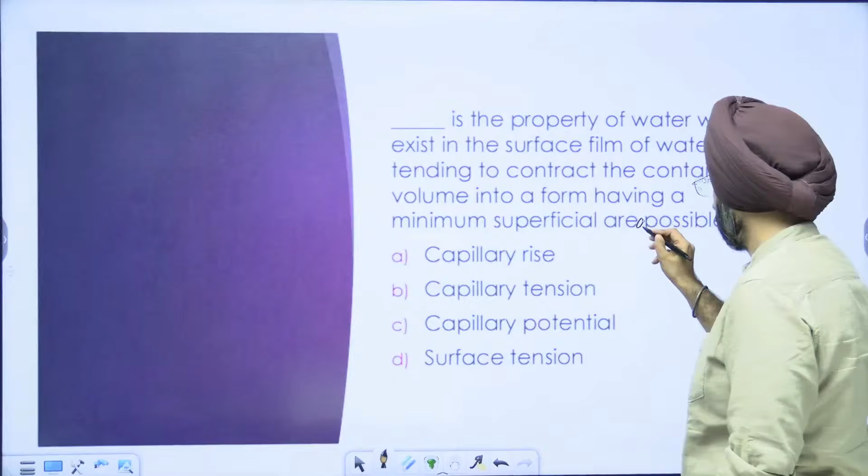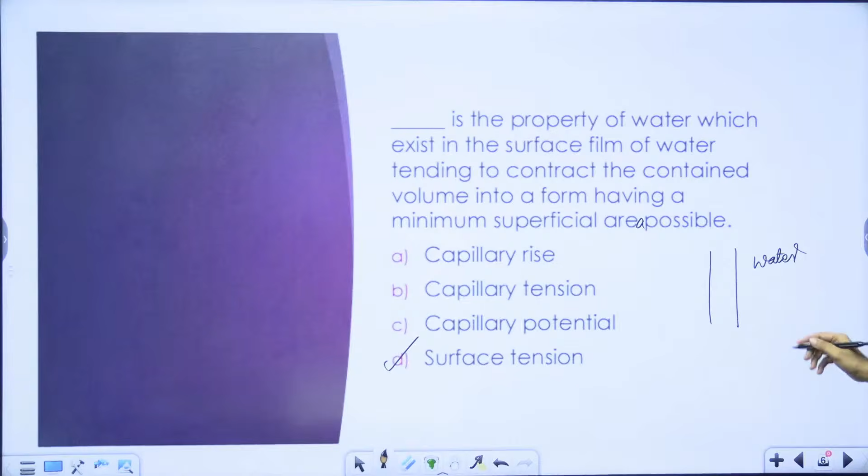Namaste. The answer is surface tension. Now I have a very interesting question for you. Let's say in a capillary tube we have added water. Now if the contact angle is 0 degree, what is the shape of the meniscus? Is the shape of the meniscus convex upwards or is it straight?

Namaste, namaste. Now listen to the question one more time. My question is that in a capillary tube you have put some water. The contact angle is 0 degree. What will be the shape of the meniscus? Will it be straight or will it be convex upwards?

So nice, so interesting, so intelligent. My dear children, none of the options is correct.

Now this is a very interesting concept and I am sure you will love this. You must know what is the meaning of contact angle. The contact angle is that angle where a fluid makes contact with the solid body. Now, if I say that the contact angle is 0 degree, this cannot be the form of the meniscus, because here the fluid comes in contact with the solid at 90 degree. So many students give the answer that the meniscus would go straight, which is not the case.

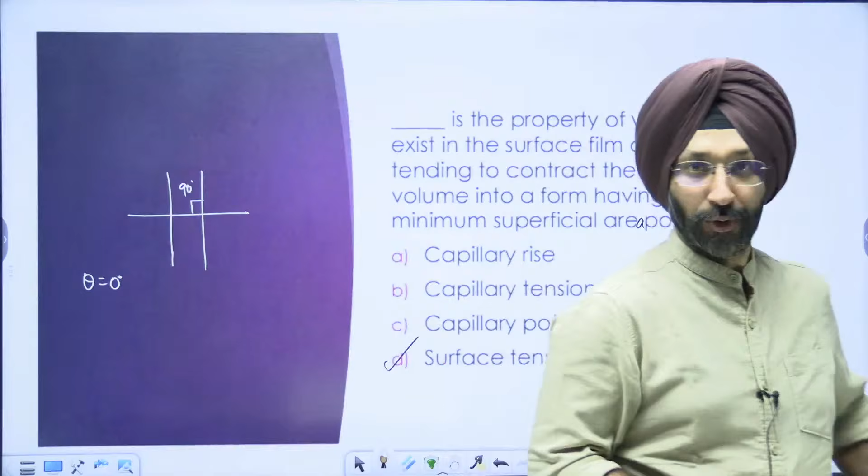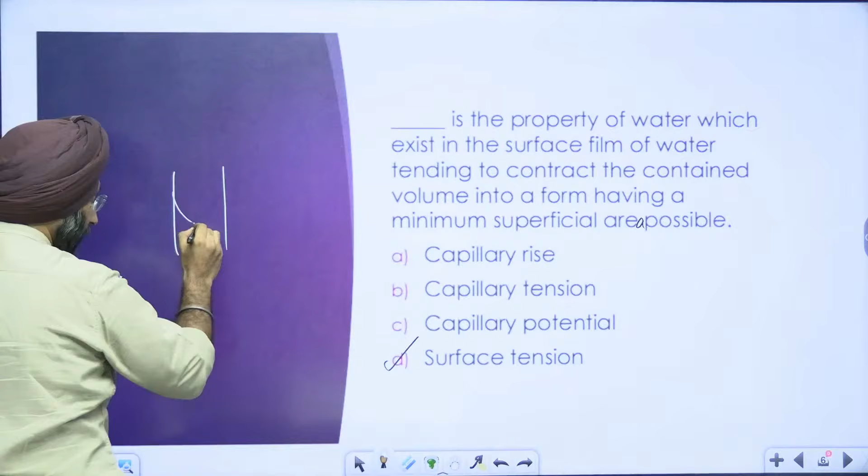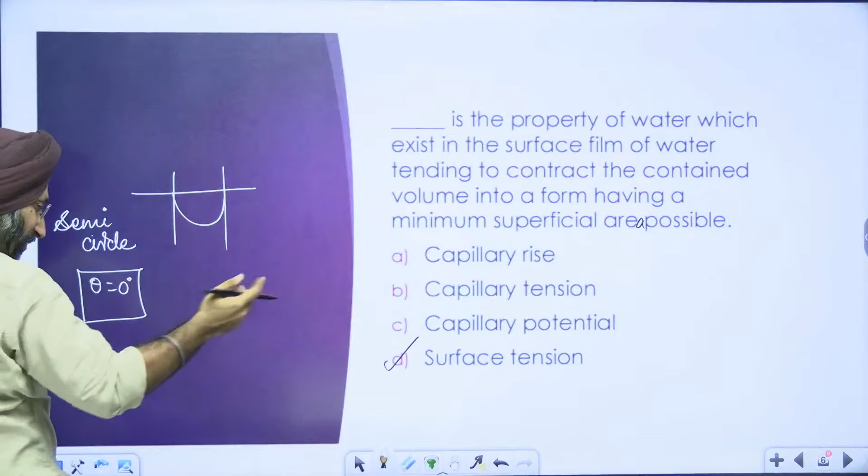So this is not the answer. So what is the shape of the meniscus? In order to make the contact angle 0 degree, this should be the meniscus. Here the contact angle, the fluid comes in contact with the solid and makes an angle of 0 degree. Now this is the shape of the meniscus, and this shape is a semicircle. So when the contact angle is 0 degree, in case of clean water, the shape of the meniscus is a semicircle.

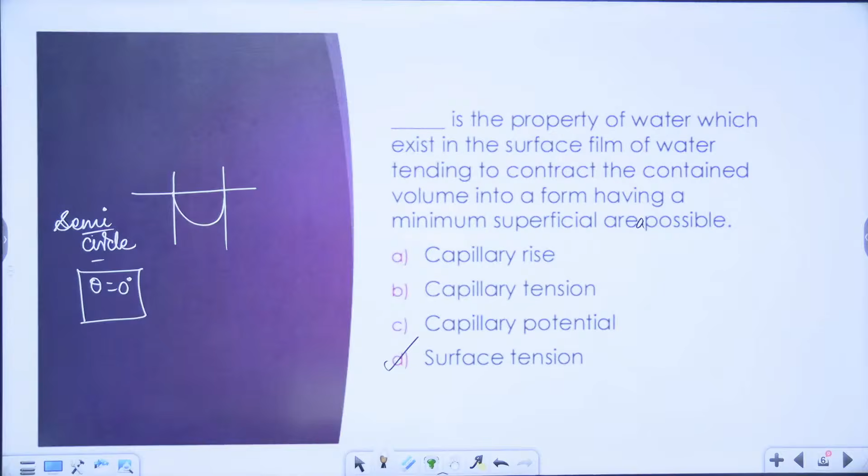What is workable? I gave so many advices, I forgot which advice of mine has worked in your favor. My dear children, in the morning I open up the mail and there are so many mails from students, and every single day I give so many advices. I believe sometimes I give more advices than a doctor and a lawyer combined. So which advice of mine worked for you? But I am happy it worked for you.

Jimmy, very good, Jimmy, Jimmy.

Characteristic load is that load which has a 95% probability of not being exceeded during the life of the structure.

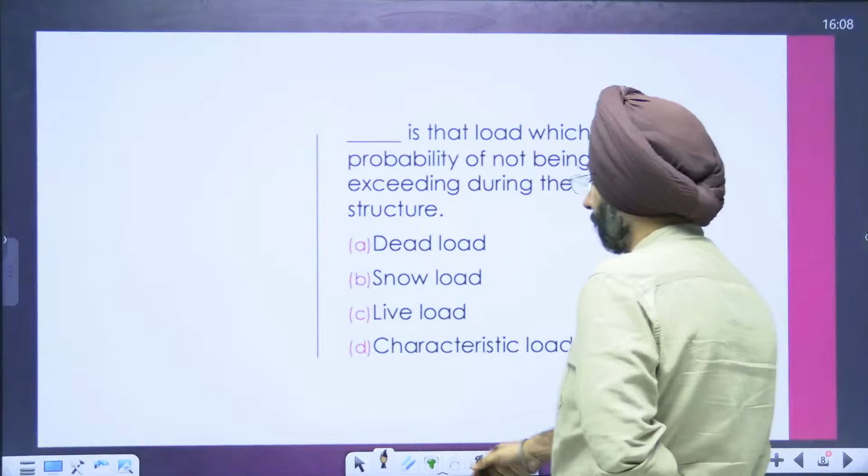Which load has a 95% probability that it won't be exceeded during its life? The question is very easy. This is characteristic load. Now my question to you is, through which IS code do we find the value of

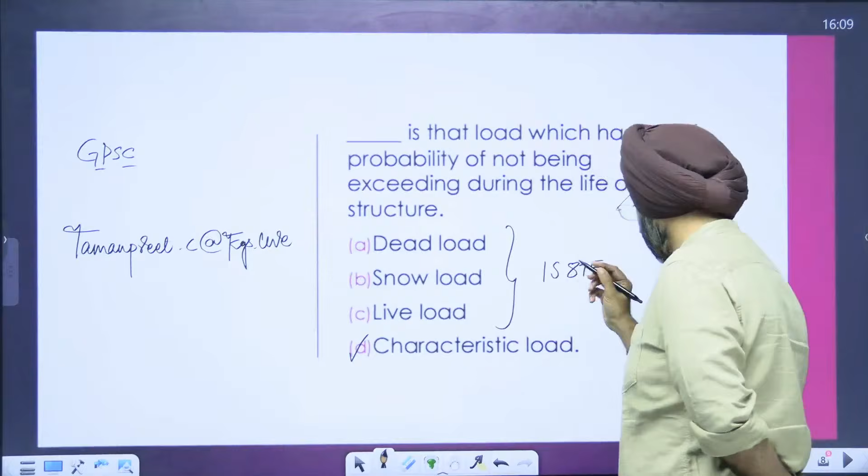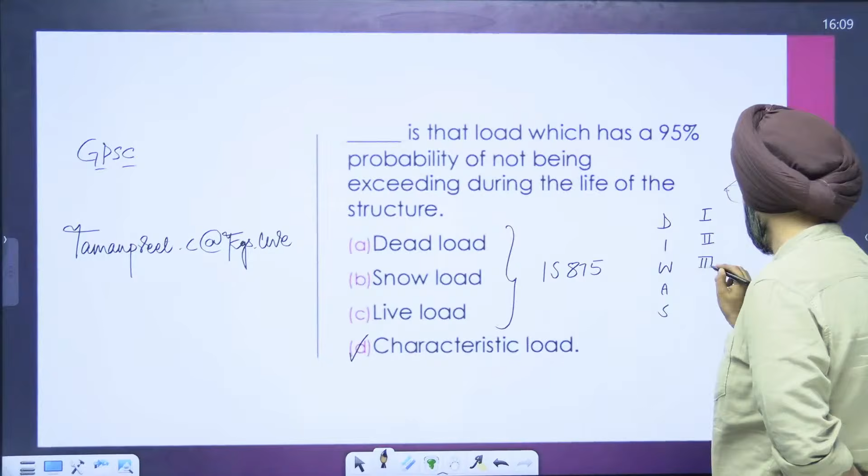And we have made a code for this, which is DIWAS. So dead load is part first, imposed load is part second, wind load is part third, and snow load is part fourth. Part fifth is the combination of these loadings. You have mailed me, definitely I will be checking it.

So mere pyare bachon, characteristic load and design load, you must know the difference between the two. What is the shear force for the given figure of a cantilever beam and loading? What is the shear force?

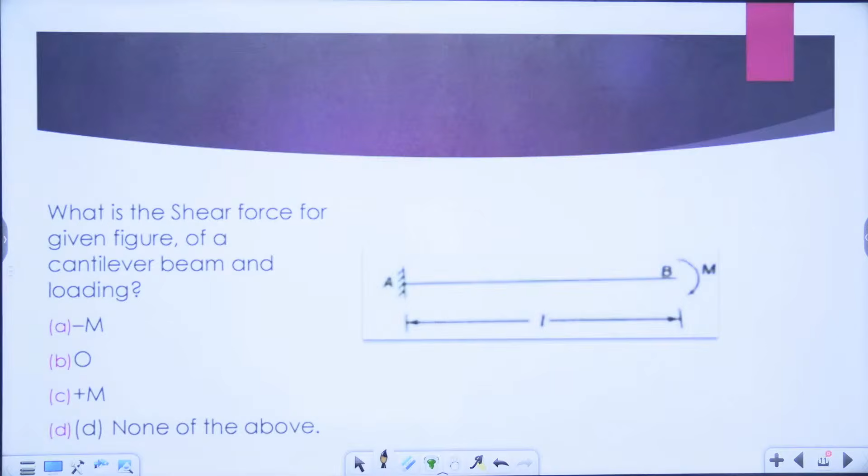Yes, bacho, this beam is under pure bending. So bending moment is constant, but no shear force is induced. Zero shear force.

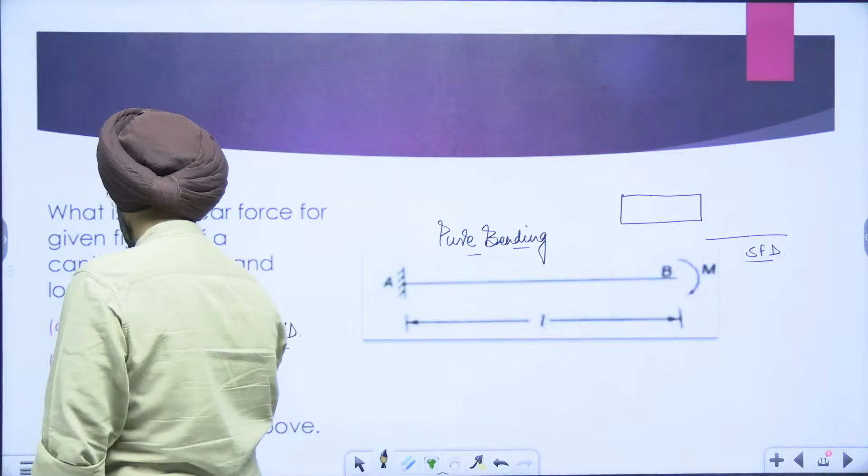Okay, if I ask you that among these options, which represent the bending moment diagram? So what should be the answer? If I ask you in the given options, which represent the bending moment diagram, what would you say? Yes, minus M, because the beam hogs. That's why.

What is the Poisson's ratio? Oh, so easy question. What is the Poisson's ratio? So this is a very simple statement. Poisson's ratio is minus of lateral upon longitudinal strain. Lateral upon longitudinal.

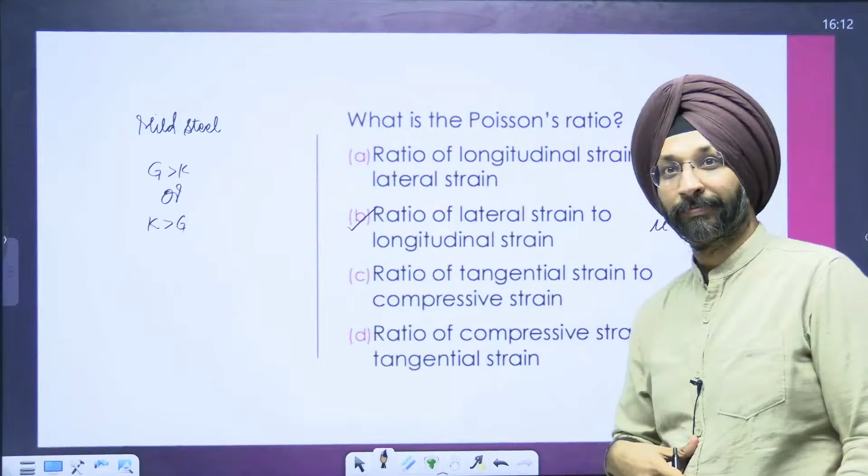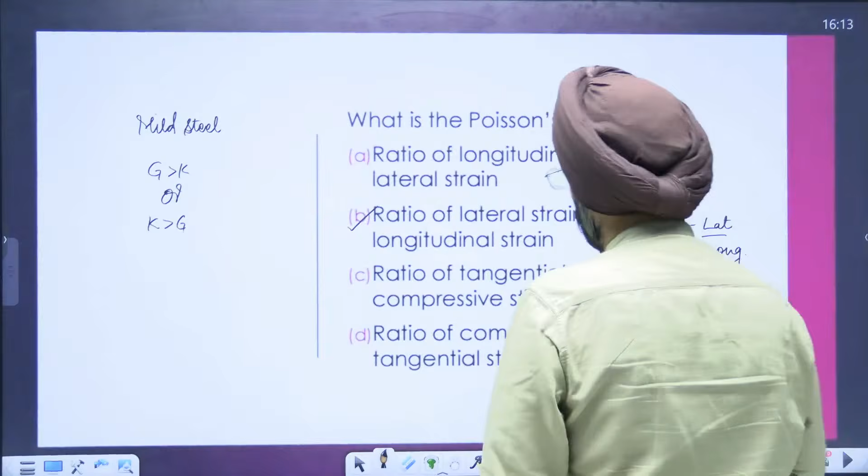But for mild steel, can you tell me, is G greater than K, or is K greater than G? For mild steel, between bulk modulus and modulus of rigidity, which parameter is greater? Now, in order to solve this question, first of all, you must know the value of Poisson's ratio for mild steel. Can anyone tell me what is the value of Poisson's ratio for mild steel? The value is 0.3.

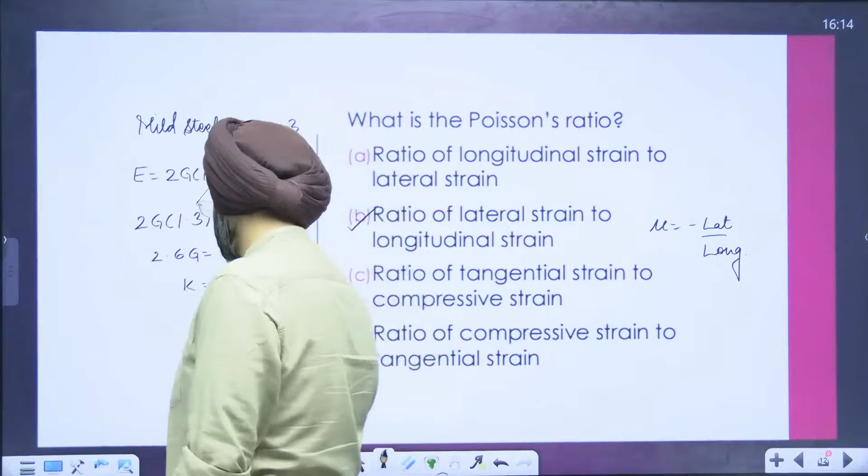Now, E is 2G(1 plus mu), but E is also equal to 3K(1 minus 2 mu). So 2G with mu is 0.3, 3K(1 minus 2 mu). This is 0.4. So 2.6G is equal to 1.2K. So K is 2.6 upon 1.2 G. Now you can clearly see that this ratio is greater than 1. It implies K is greater than G for mild steel. So this relation is valid for mild steel, and as you can see, E is greater than both of these terms. So for mild steel, Young's modulus is greater than bulk modulus, which is greater than modulus of rigidity.

So this question is very interesting in fact. But which material has zero Poisson's ratio? Which material has zero Poisson's ratio? I'll give you a geotech question on the spot, my boy.

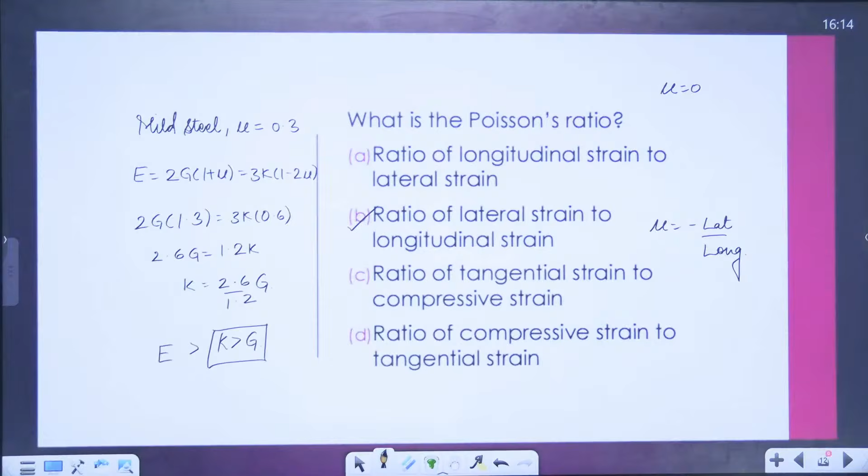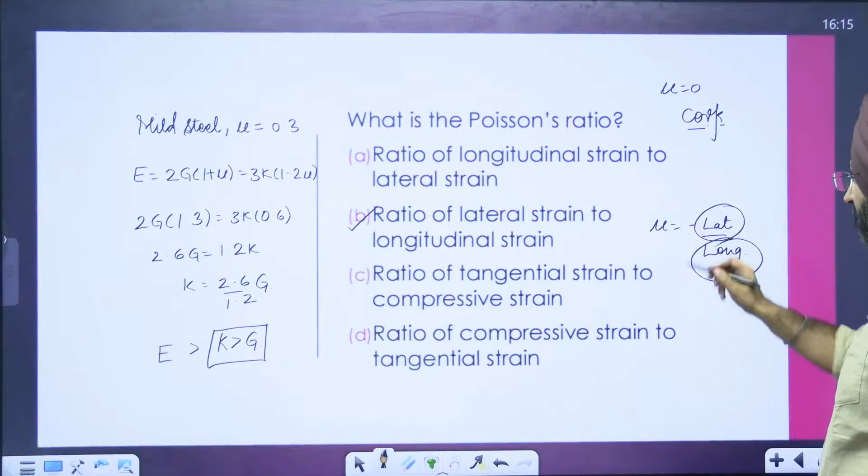For richer mixes, the value of Poisson's ratio increases. This is cork. So what happens to cork is when you apply the load, the longitudinal strain occurs, but there is no lateral strain. So in case of cork, when you apply a tensile load, the length of the cork will increase without any change in the lateral dimension.

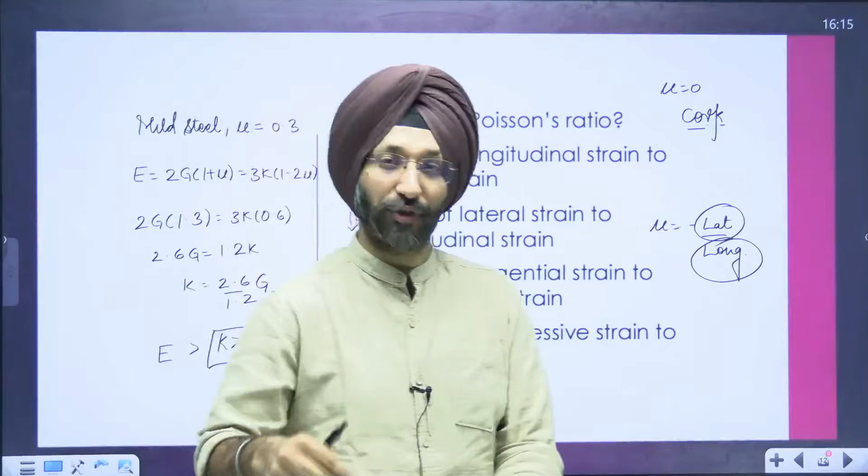Now, this has a very unique purpose in case of the bottles of champagne. So what happens in champagne is you seal the bottles of champagne with cork. Now, the external and internal pressure is applied on this cork. So the cork compresses. Now, if the cork compresses, or if a material compresses, its lateral dimension should expand.

Now, this may lead to the breakage of the bottle. But in case of cork, when the longitudinal dimension changes, there is no change in the lateral dimension. Now, this keeps the bottle intact. So this is the reason cork, which has a zero Poisson's ratio, is used to seal bottles. Pyare bachcho, if you get this concept, then please write yes.

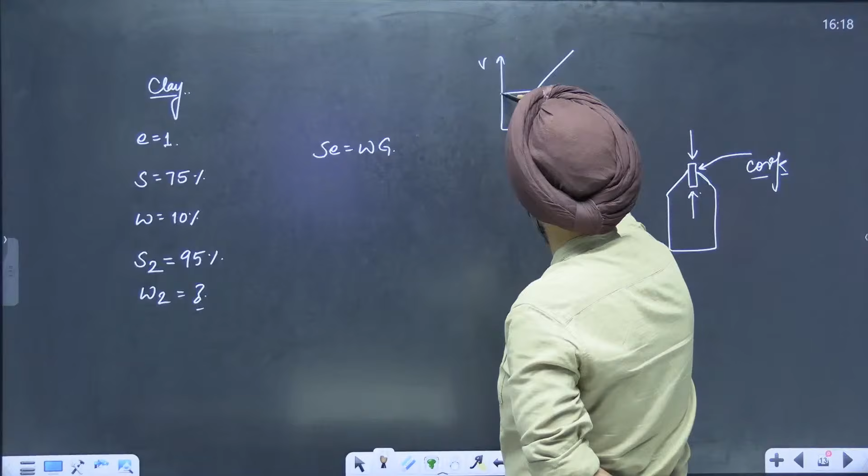So pyare bachcho, you will say sir, Se equals wG. Now if I draw the diagram up to shrinkage limit, you know this that before the shrinkage limit, the soil is partially saturated. So if we increase the degree of saturation from 75 to 95%, we have increased the water content without changing the void ratio. So void ratio remains the same and so does the specific gravity.

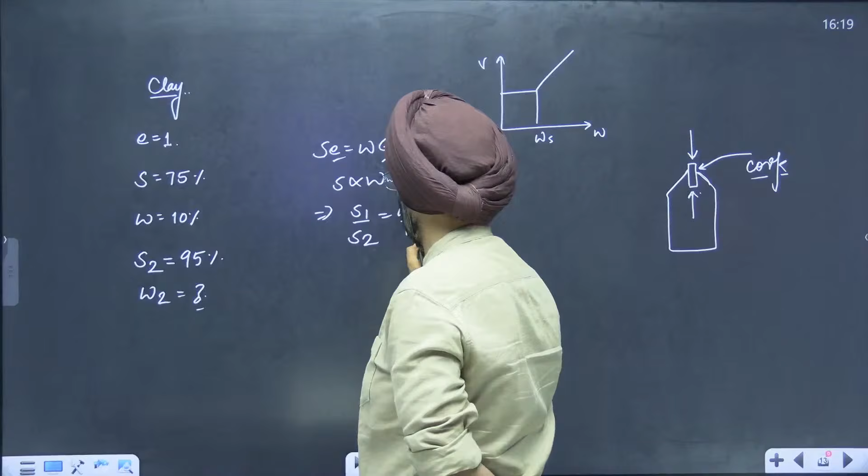So S is proportional to W. So S1 upon S2 is W1 upon W2. Degree of saturation is 75, water content is 10. Now it is changed to 95. What is the water content? This is the question. So all we need to do is solve this simple calculation which you have already done. So 95 by 75 gives 12.67. So water content is 12.67%.

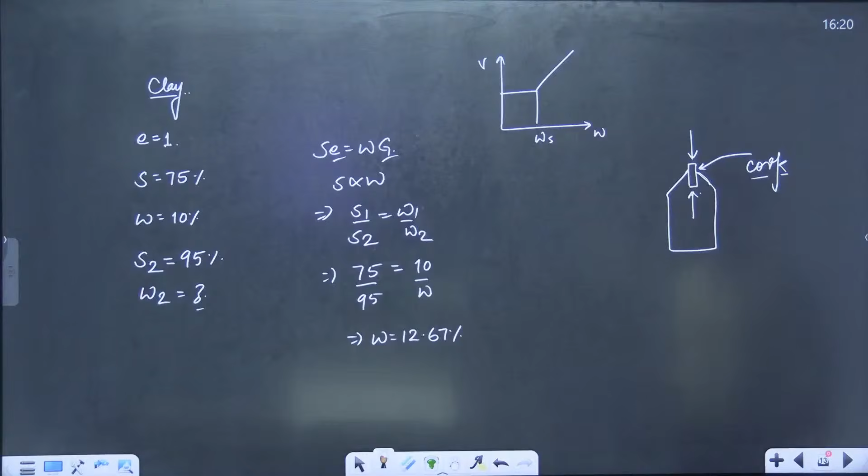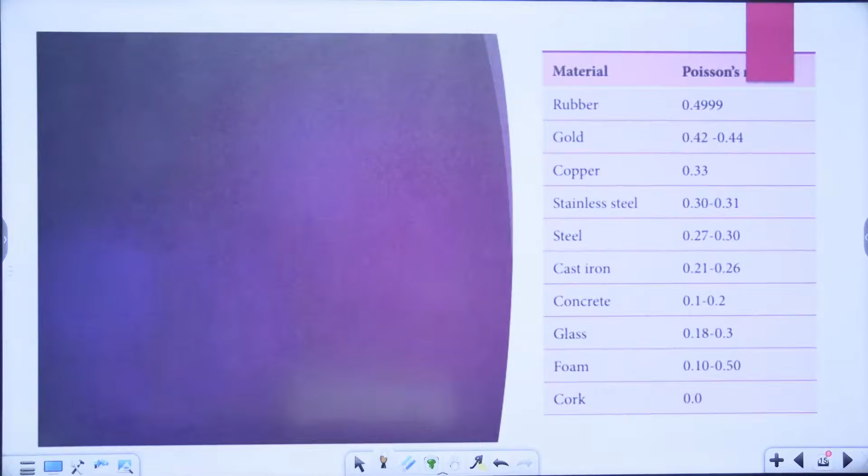Now, this is the value of Poisson's ratio for certain materials. Make sure you know this value, because frequently the Poisson's ratio value for certain material is asked.

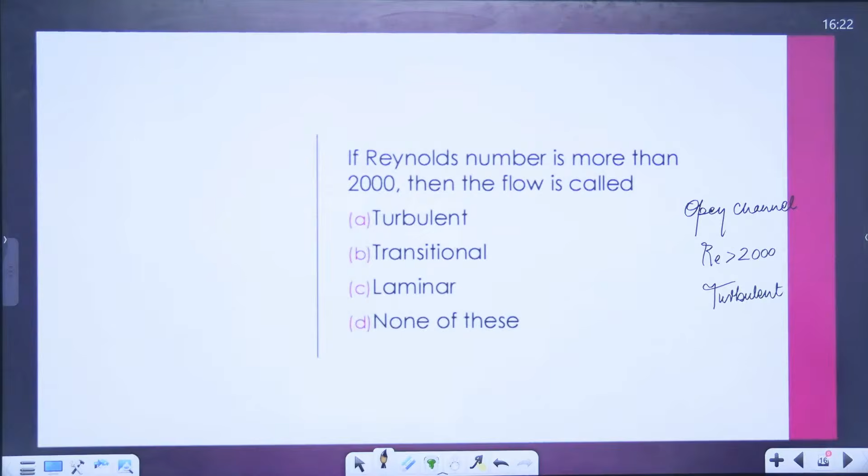So now if we use some very interesting concepts, then for the given question, the most appropriate answer is turbulent. Because now if we need to select one answer, two answers cannot be done here. We need to mark only one answer, then answer should be turbulent. We will assume that they are talking about the open channel. For pipe, option A and option B both could be correct. But this is an MCQ, only one option need to be selected. Then we will go with open channel, because for open channel, if the Reynolds number is greater than 2000, it has to be turbulent.

Good question. Mere pyare bachche, we should not go with none of these because, as I said, the answer can be turbulent because they have not mentioned what type of conduit is this. And this question is asked in competitive exams and the option marked is option A only. Don't go with option D, mere bachcho. I am already explaining this, that the answer is option A because it is not mentioned in the question which type of conduit is this.

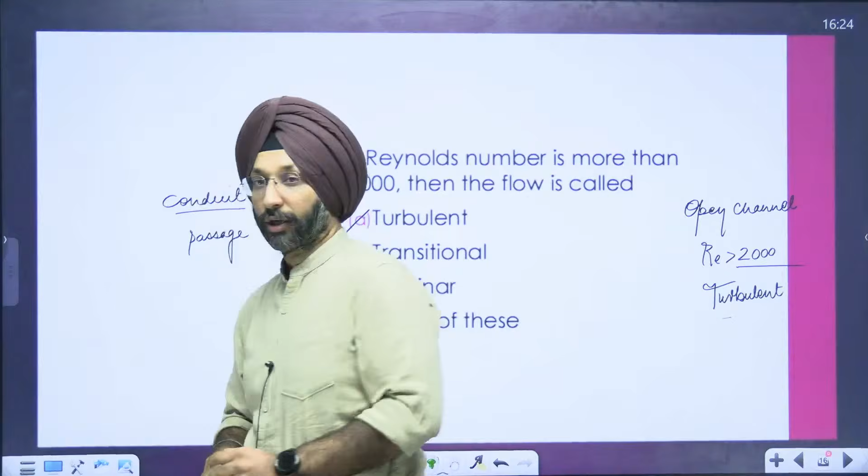What is a conduit? Conduit is a passage through which a fluid moves. So pipe is a conduit, open channel is a conduit. They have not mentioned the type of conduit. You assumed it that the conduit is pipe. Eventually it is not. Now let's say if the option transitional was not there, then you can say the answer is option A. If turbulent was not there, again you can say the answer is option B. But when both the options are given and it is not mentioned the type of conduit, assume it to be open channel and then give the answer. Once you assume it to be an open channel, then you are 100% sure it has to be turbulent.

Mere pyare bachcho, you must have heard that shrinkage ratio is V1 minus VD divided by VD, divided by W1 minus WS. But this shrinkage ratio has another expression. That expression has gamma W in the denominator, and there is a term in numerator and denominator. Can you tell me what comes in the numerator and denominator? Gamma d by gamma w. Very good. Now gamma d is weight of solids divided by Vd.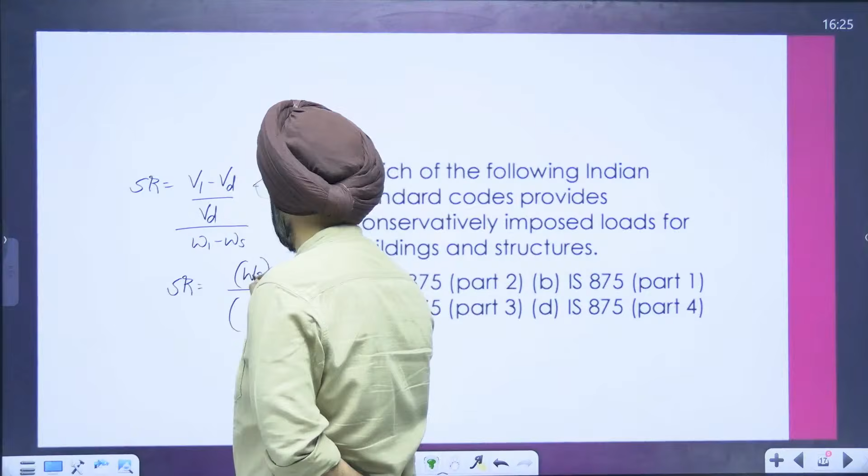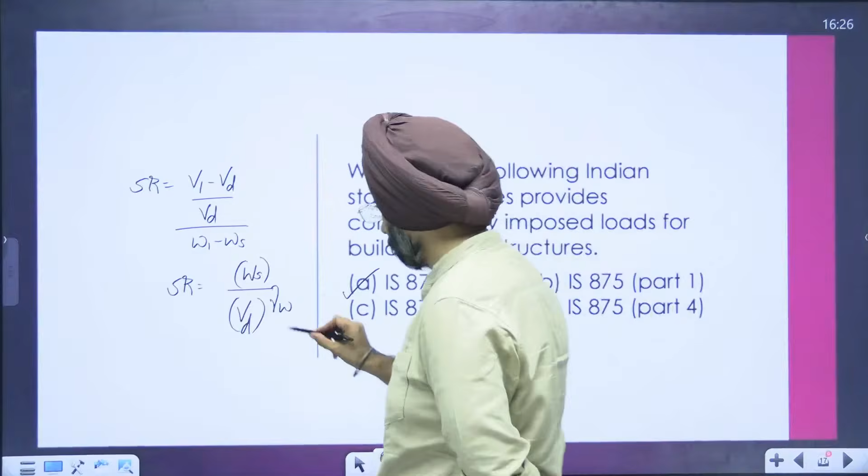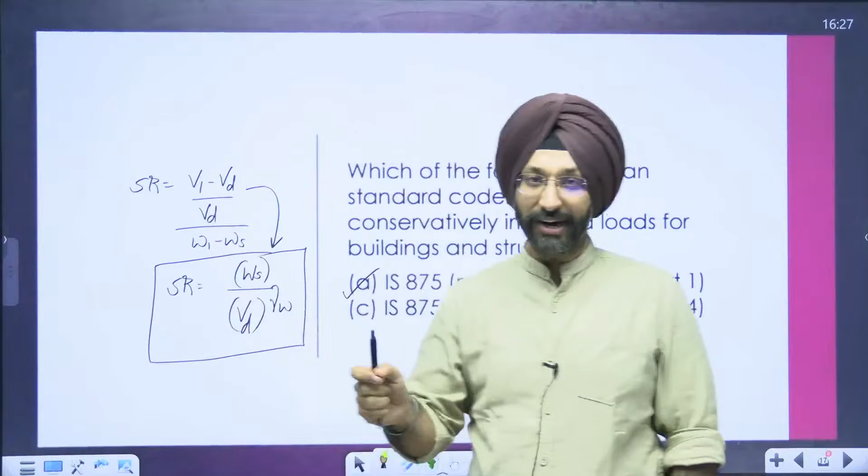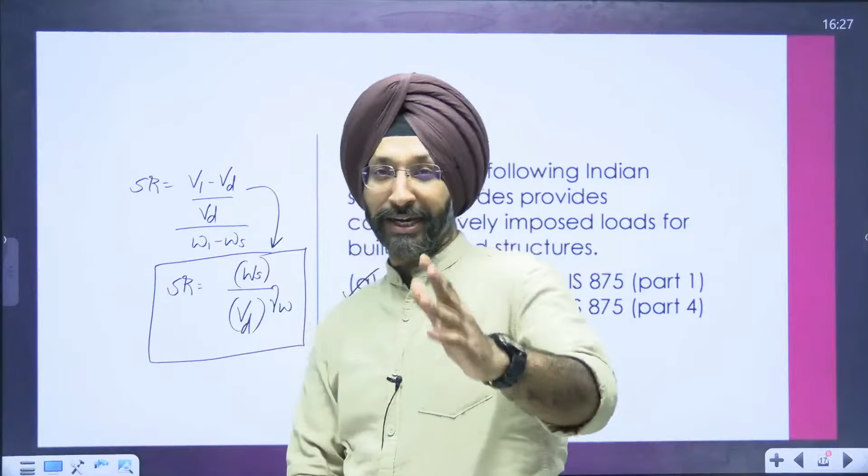Do you want me to derive this equation? Should I derive that, how from this value we got this value? Because if you already know the explanation, then we will move to the next question. And if you are not aware how we conclude the second formula, then I will derive it. Now mere pyare bachcho, you are about to learn something very, very interesting. And once we learn something new, and trust me, you will be learning something new, as you are not aware how we deduce this formula. So 100% in the next 5 minutes, you will be learning something very new. And once we learn something new, we should cheer it. So once you get the concept, I want you to use as many emojis as possible in the comment section if you get the concept. If you do not understand, then there is no need to write anything. Because the concept that I am just telling you, I believe you will love this. So pyare bachcho, we know this.

This is the expression. Let's say this is the water content W1. This is the shrinkage limit. At the shrinkage limit, the volume is Vd, the dry volume, and the volume at W1 is V1.

My question was how you deduce the second expression of shrinkage ratio. In order to derive that equation, first you must know the equation of this straight line. Let's say this point is C. We know that at point C, the soil is 100% saturated.

Now we know that SE is equals to W into G for any point at or beyond C. For any point at or beyond C, we know this, that the value of S is 100%. You know this concept: at all the consistency limits, the soil is fully saturated. So E is equals to WG.

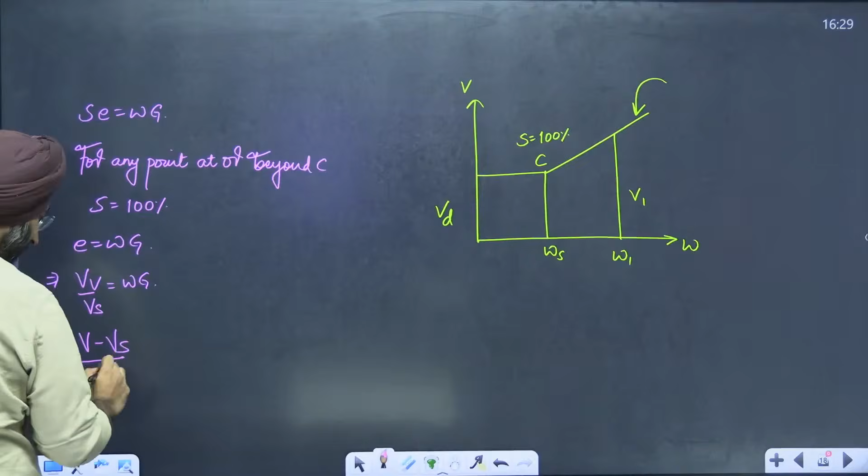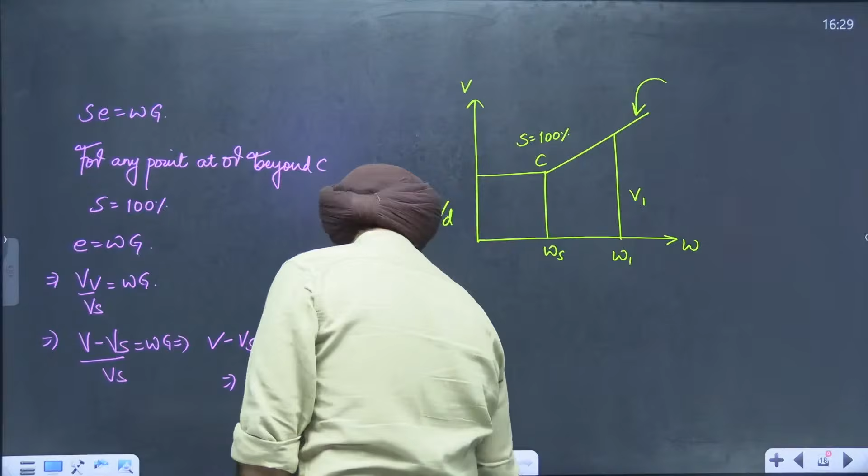Now what is the expression of E? E is volume of void by volume of solid. This is equals to WG. Now volume of void is total volume minus the volume of solid, divided by Vs, equals W into G. Cross multiply: V minus Vs is WG into Vs. Rearrange this, so V is equals to G into Vs, in bracket multiplied by W, plus volume of solid.

Now what we have done is beyond point C, we came to know that the change in volume and water content follows a linear pattern, because if you compare this equation it resembles a straight line. So if I put volume on the y-axis, water content on the x-axis, what I get is a linear variation. The first thing we can deduce is how we come to know that beyond the shrinkage limit, the volume varies linearly.

We know that the volume varies, but why linearly? It could be parabolic or any other variation. So if someone asks you this, you would say that we have derived that beyond point C, the volume and water content vary linearly through this equation. So because of this equation, you are able to put a straight line beyond point C. So the volumetric change with water content is linear. Tell me, are you able to grasp this point?

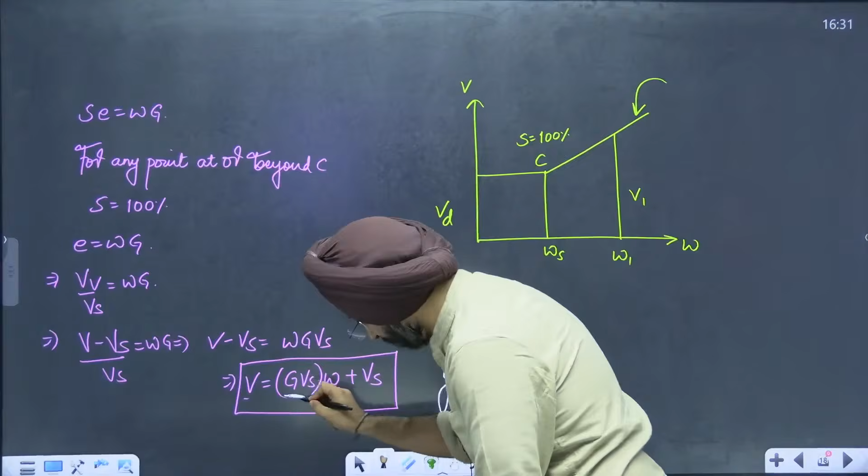Very good. Now this GVs is the slope of the straight line. So the slope of this straight line is G multiplied by Vs, simple mathematics. Now the expression for shrinkage ratio was...

V1 minus VD divided by VD, divided by W1 minus WS. We know that tan theta is the slope, which is perpendicular upon base. So this value is the perpendicular.

V1 is this entire value and VD is this value. So if I ask you what is the perpendicular, you will say V1 minus VD. In the same way, if I ask you what is the value of the base, you will say W1 minus WS. This is the slope of this line.

Simple mathematics. But we have already proved that the slope of this line is equals to GVs. Now V1 minus VD upon W1 minus WS, so we can write down G times Vs upon Vd.

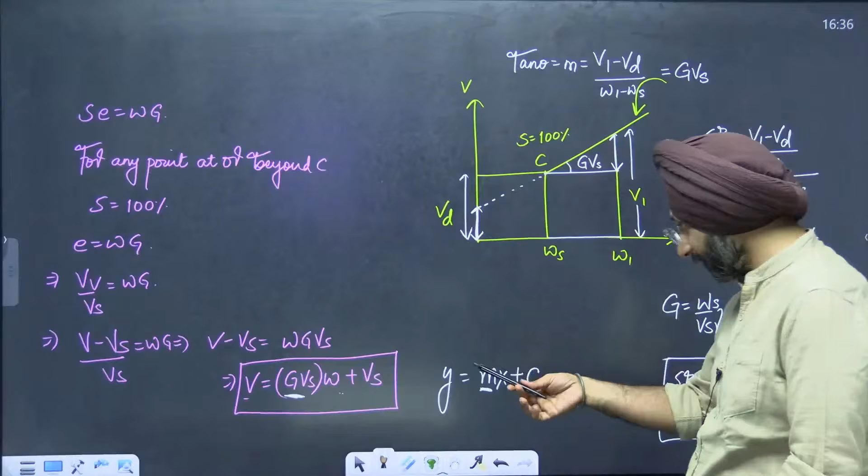Very good. This also you can deduce from this equation. Y is equals to mx plus c. This c is the intercept on the y-axis, meaning if you extend the line up to the y-axis, where would it cut the y-axis? So where will it cut the y-axis? At Vs. So this value is Vs.

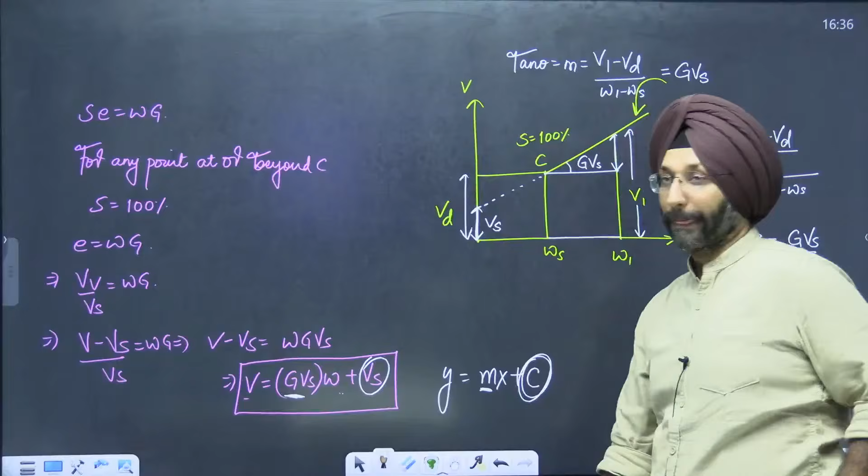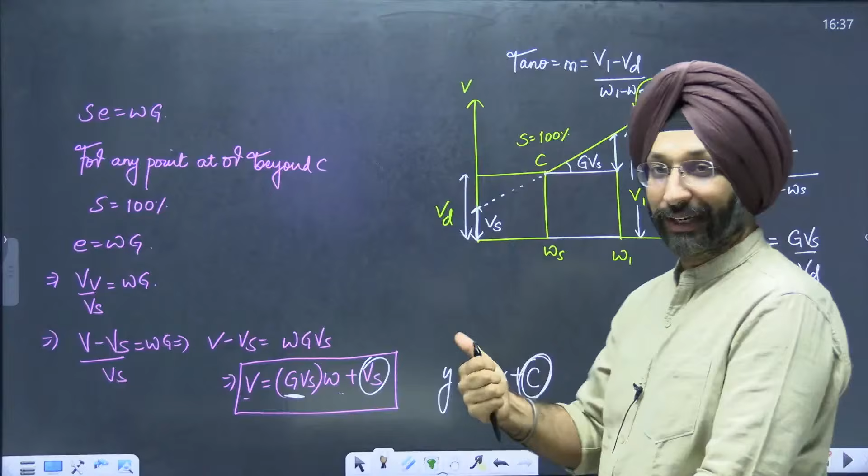This is what I always say to you, my dear bacho, that you need to learn the concept. It is very much possible that this derivation you may not need in your competitive exam, but once you get these type of concepts, you get the confidence. And trust me, competitive exams and life is all about confidence. Confidence comes from knowledge, and knowledge comes from hard work.

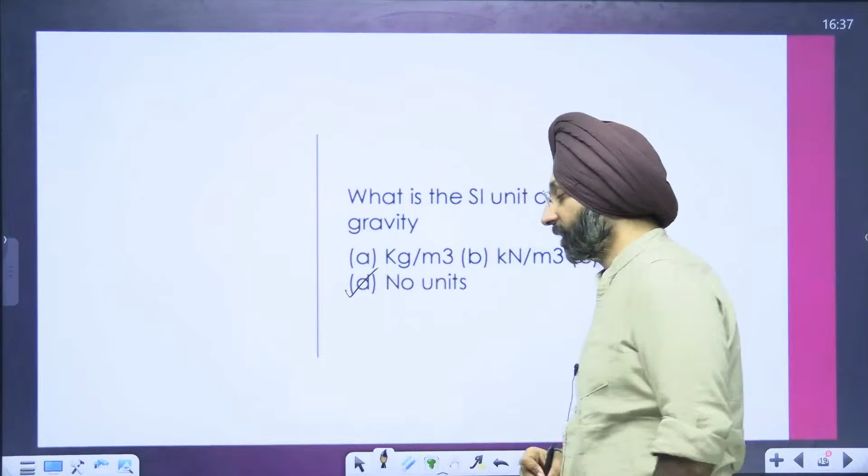Chalo, moving on to the next question. What is the SI unit of specific gravity? There is no unit of specific gravity. Density upon density, unit weight upon unit weight - there is no unit.

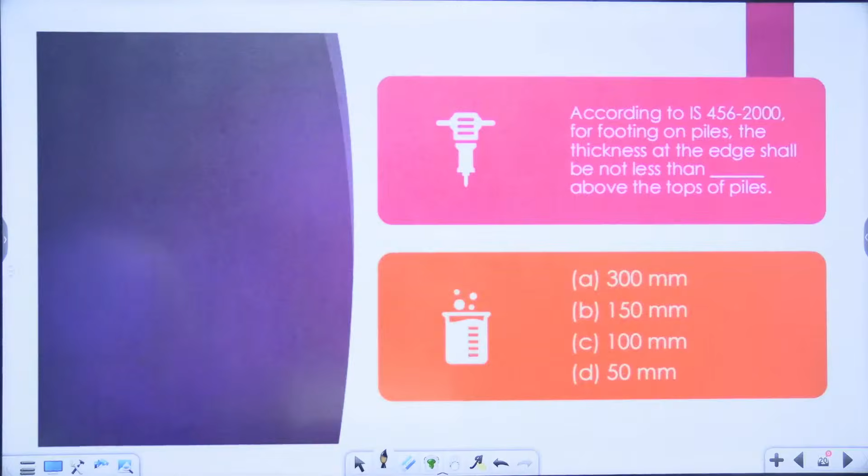According to IS code, for footing on piles, the thickness at the edge shall not be less than what? Now this type of question is all code based. If you have read the code, then you can answer it within 10 seconds. The value is 300 mm.

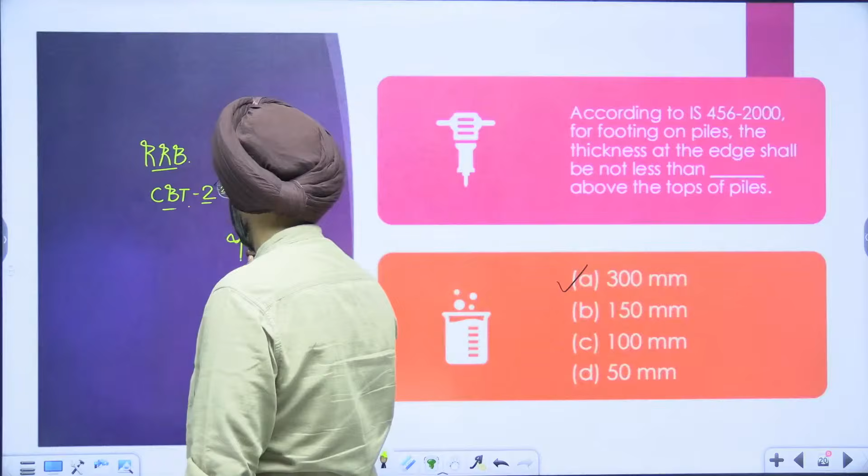The ratio of actual discharge from an orifice to the theoretical discharge from the orifice is known as what?

Oh, same day RRB and DSSSB. Now this is not commendable, because it is possible that some students may get selected in both the exams. And what?

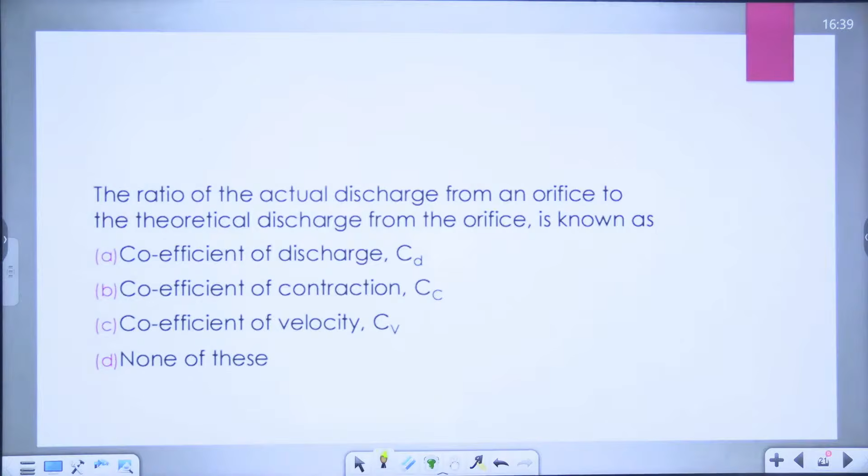This is coefficient of discharge.

This is pyknometer. This is pyknometer.

But this was not the question I was really putting effort into. My question is, you are aware with the symbols W1, W2, W3, W4. The numerator is W2 minus W1. In terms of W1, W2, W3, W4, what is the denominator? This is my question. Let's see how many of you know this.

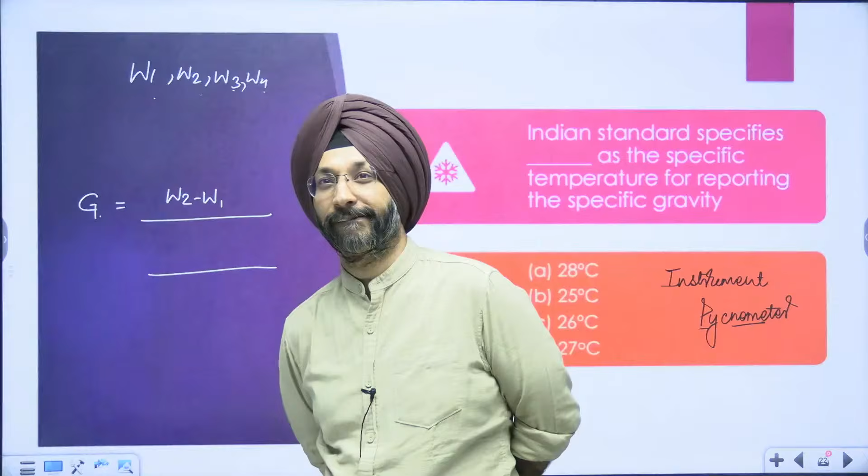Now I am writing down the denominator. Just check you have written it correctly or not. The denominator is W4 minus W1 minus bracket W3 minus W2. Now I am not saying which one of you have written it correctly or incorrectly. Just check it by yourself. Have you written it correctly? If yes, well and good. If not, then please make sure that you remember the formula correctly, because this specific formula is regularly asked.

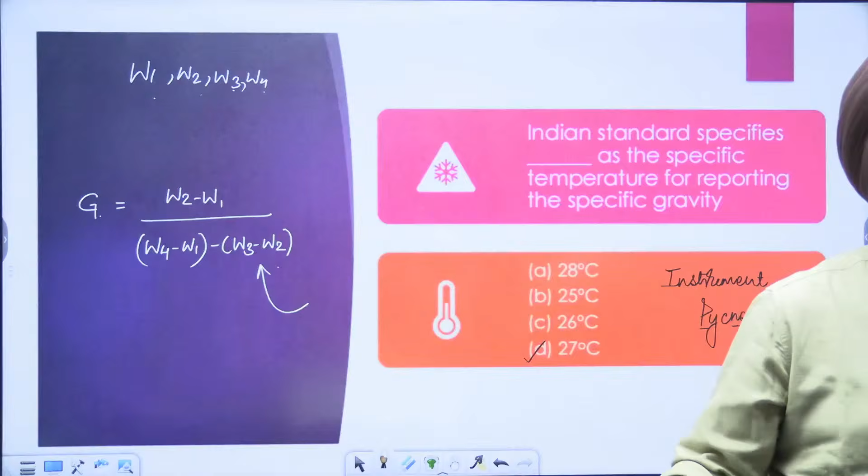Now we know that W2 minus W1. Can anyone tell me what is the value of W2 minus W1, mere pyare masoom bachcho? Good, this is weight of solids. So you can further simplify it. Weight of solids, open the bracket, W4 minus W3. Now open the bracket, this minus minus plus, W2 minus W1 means plus weight of solid. Okay, so please make sure you remember the formula correctly, as many students forgot the formula.

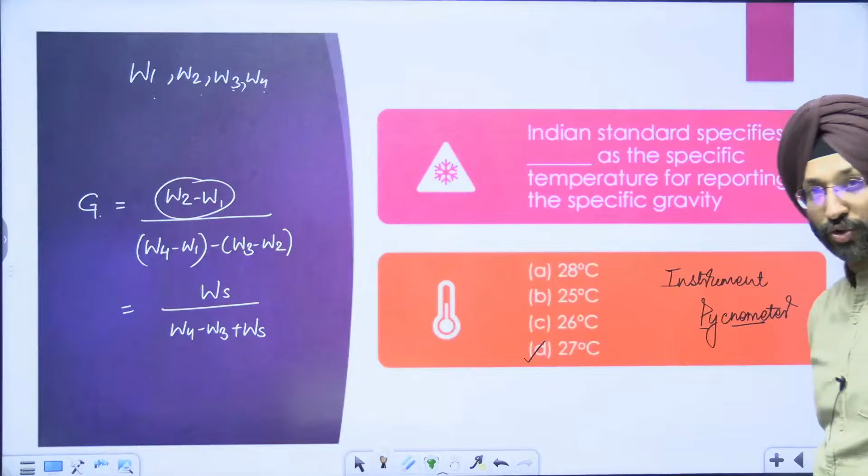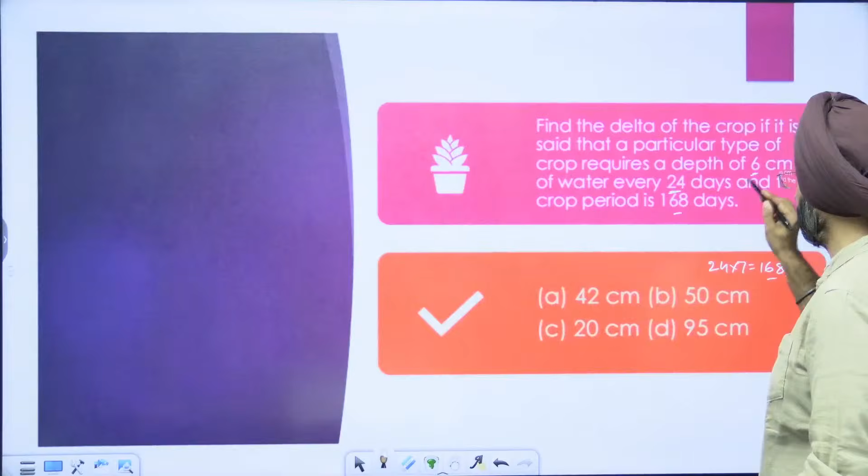Find the delta of the crop if it is said that a particular type of crop requires a depth of 6 centimeter of water every 24 days and the crop period is 168 days. Now this is very easy question. So first of all, find out how many times you need to water the plants. 24 multiplied by 7 is 168. So 7 times you need to do it, and every time 6 centimeter is the depth. So 7 into 6 is 42 centimeter.

In the limit state method, now this is a very easy question. What is the minimum strain in tensile reinforcement before its failure?

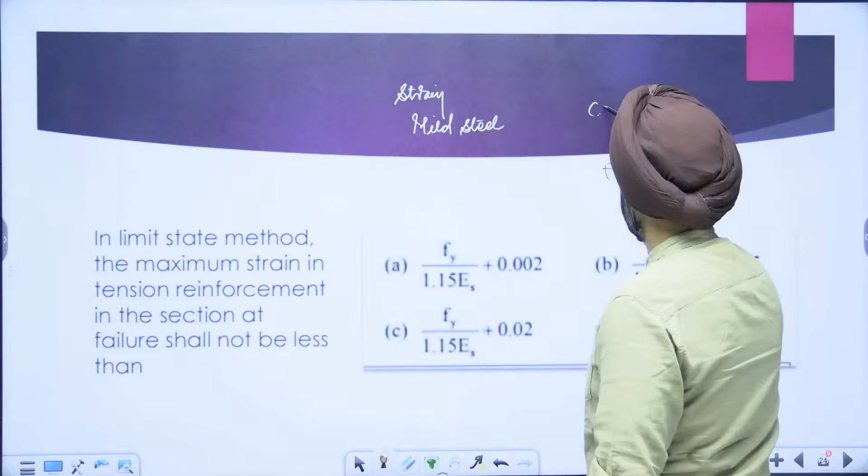Very nice. So based on this formula, can you tell me what is the strain at the time of failure in mild steel. This is the minimum strain, minimum. Oh sorry, maximum strain at the time of failure. Not maximum, sorry, this is minimum. 1.086? Okay, so you people are saying sir, the value is 0.001806. Obviously, in case of mild steel, you are not adding this value.

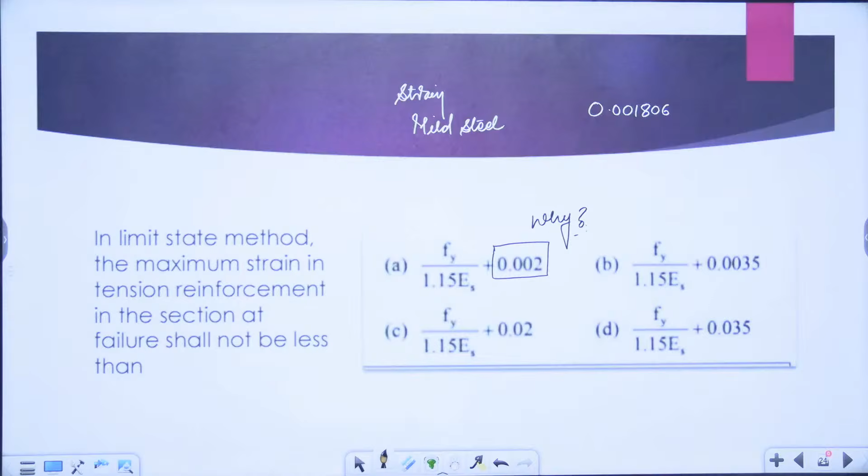Very nice, very good.

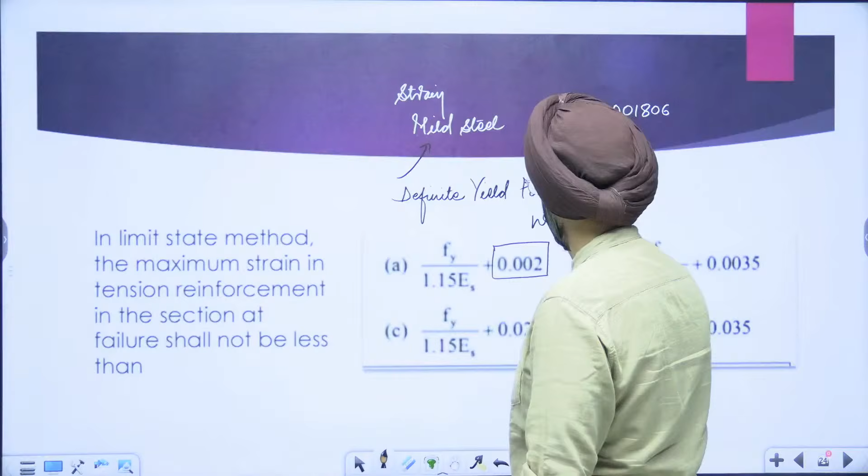For mild steel, there is a definite yield point. So in those materials where you have a definite yield point, you do not require the concept of proof stress or proof strain. So in case of Fe415 and Fe500, you need to apply the concept of proof strain, but not in case of mild steel, because in mild steel, through the stress strain curve, the yield point can be determined.

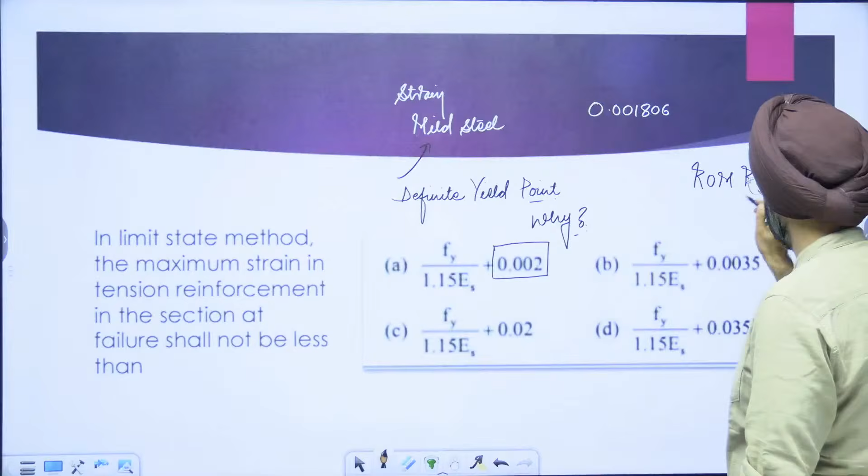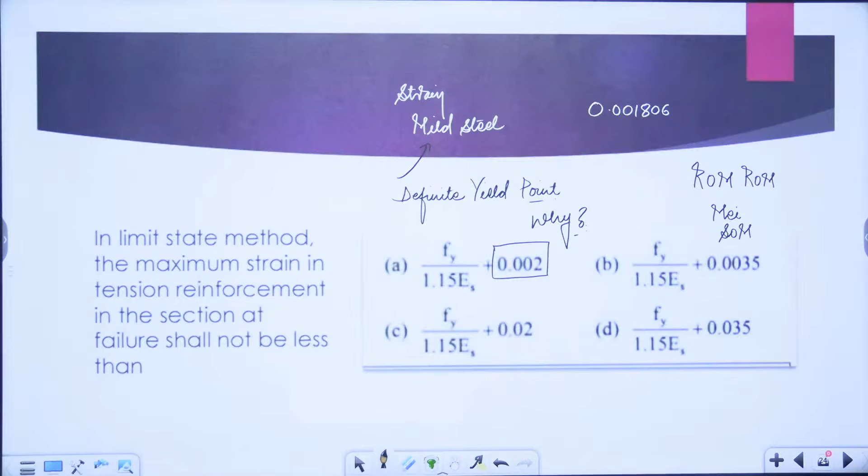Finally, I request one - sir, what is this? SOM class, where do you want me to conduct the SOM class? In my early days as a teacher, my tagline was 'rom rom mein SOM' - so much I love SOM. And to be honest, I was among the university toppers in strength of materials - not the university topper, but among the toppers. At least of my college, I was the topper. And in my days, there were very few civil engineering colleges in Uttar Pradesh.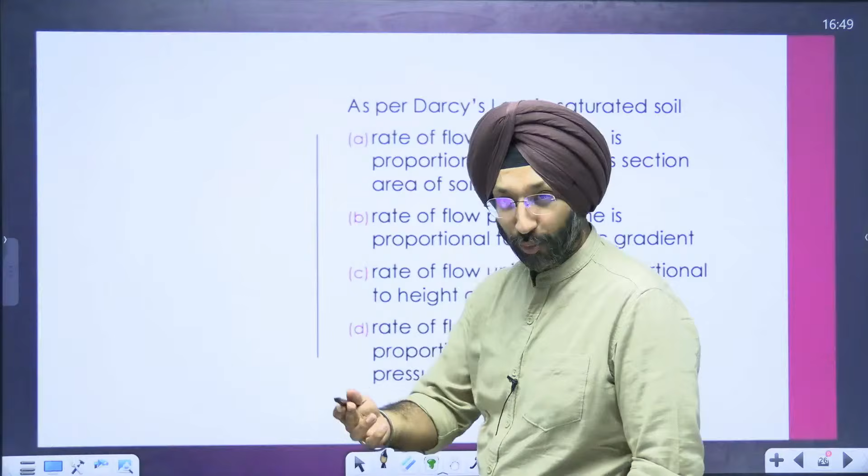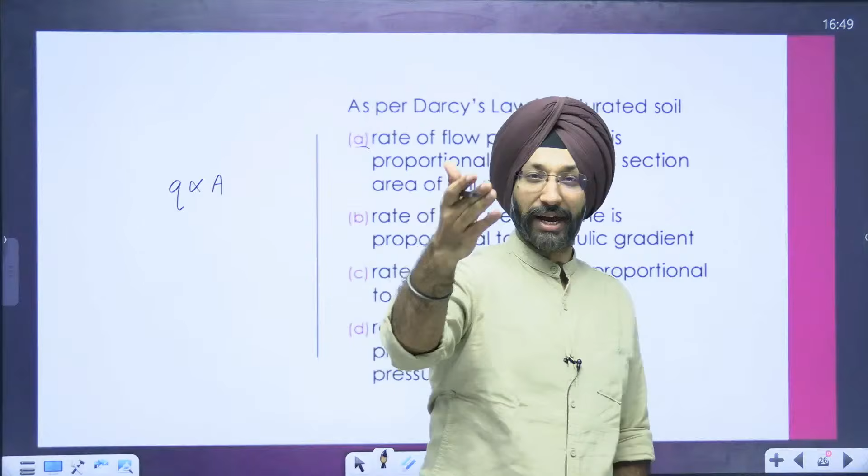Very good. My question to you is, almost everyone among you said that option A is incorrect. But Darcy's law states that discharge is proportional to area. So why are you saying that option A is incorrect?

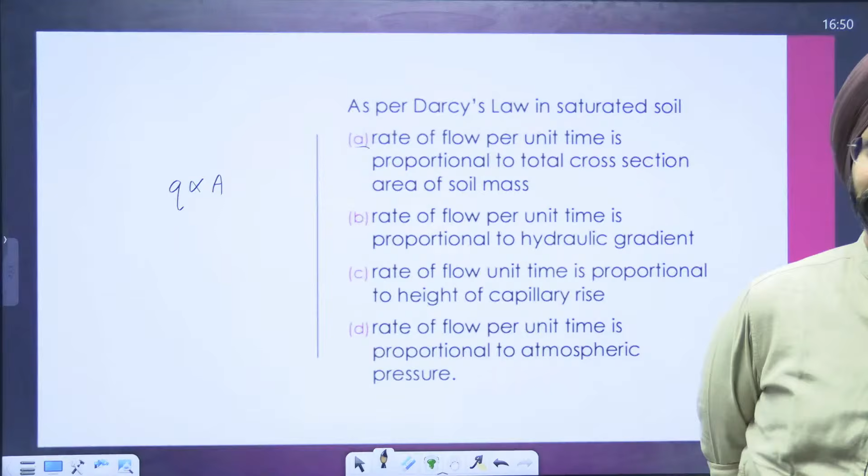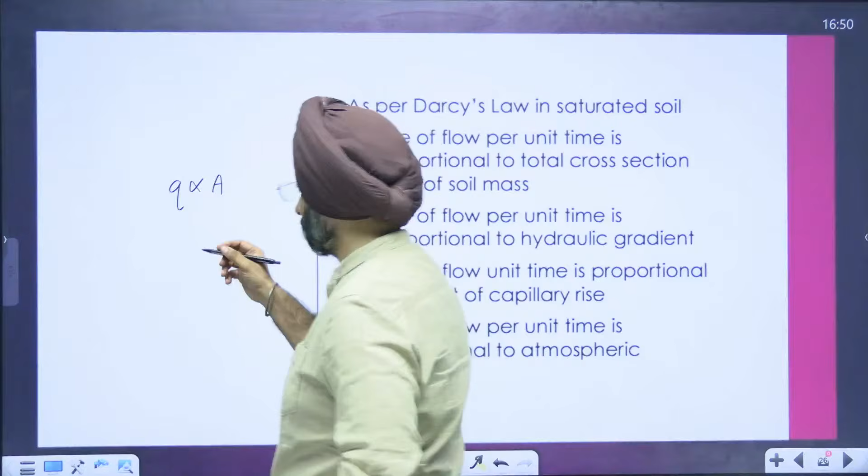I can get the point that you people must be thinking, sir, only one option can be correct, and in this case either we should go with option A or B. But no, both options are equally correct, because discharge is proportional to total area and discharge is proportional to hydraulic gradient. So we cannot say one option supersedes the other. Both options A and B are equally correct.

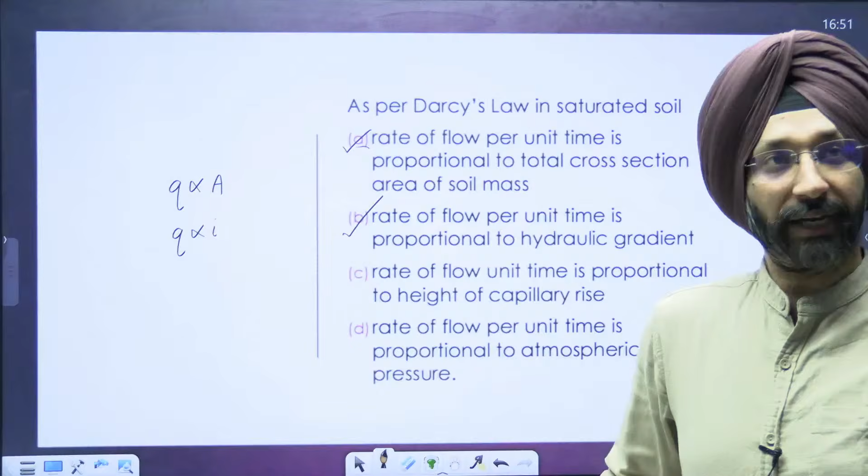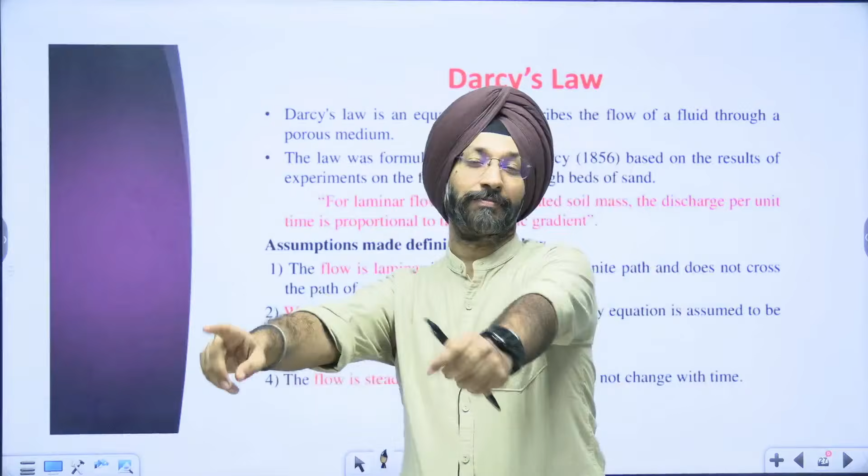This is the statement of Darcy's law. Now, one of the students asked, sir, is Darcy's law applicable on coarse grained soil or is it applicable on fine grained soil? Can anyone give me an example that it is applicable on both soils? There is a certain way you can explain that Darcy's law is as much applicable to coarse grained as it is applicable to fine grained. Can you give the reason?

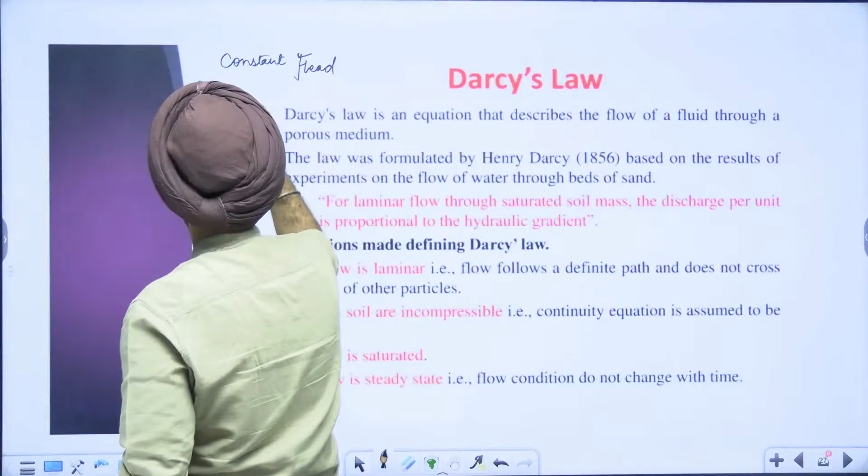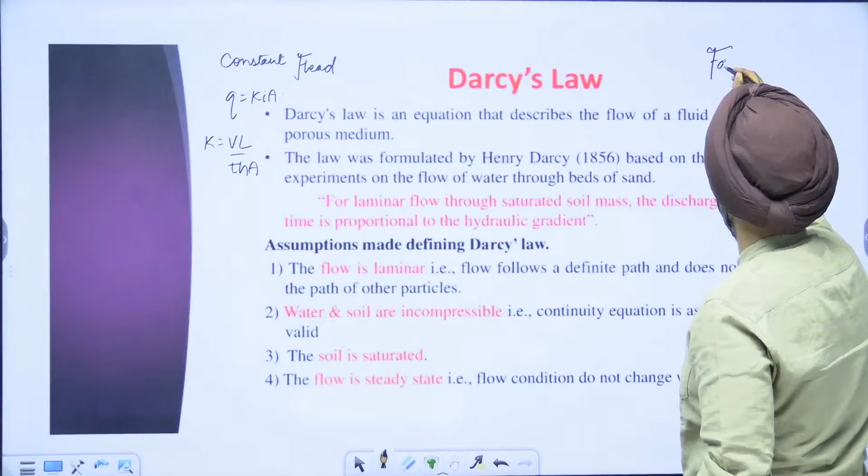Now I give you a very simple example. My dear children, in constant head method, you apply Q equals KIA, and through this you deduce the formula VL upon THA. In the same way, for falling head, again you apply Q equals KIA, and you put this KIA equals minus a dH by dt. In both cases, even in falling head where the soil is fine grained, and in constant head where the soil is coarse grained, in both cases you apply Darcy's law. So Darcy's law is applicable on both soils.

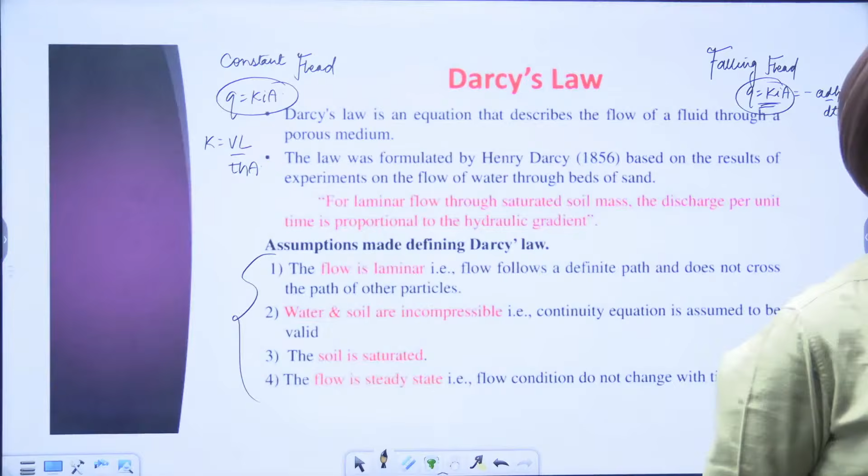Chalo, let's solve the last question. When the soil mass is saturated, its bulk density is called what?